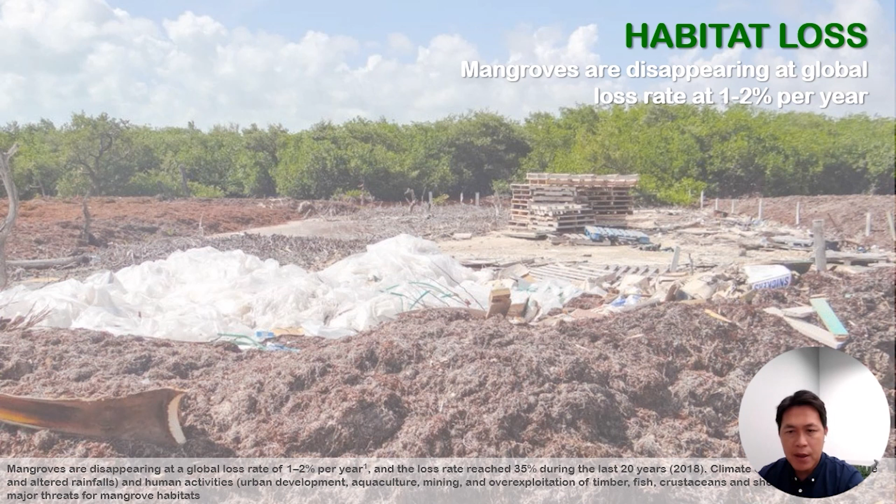While urbanization is happening in many big cities, people are trying to move to the city, and this causes forest loss. The forest loss also creates habitat loss. People living in coastal cities are always losing the mangroves. And air pollution is a very bad condition for people living in big cities.

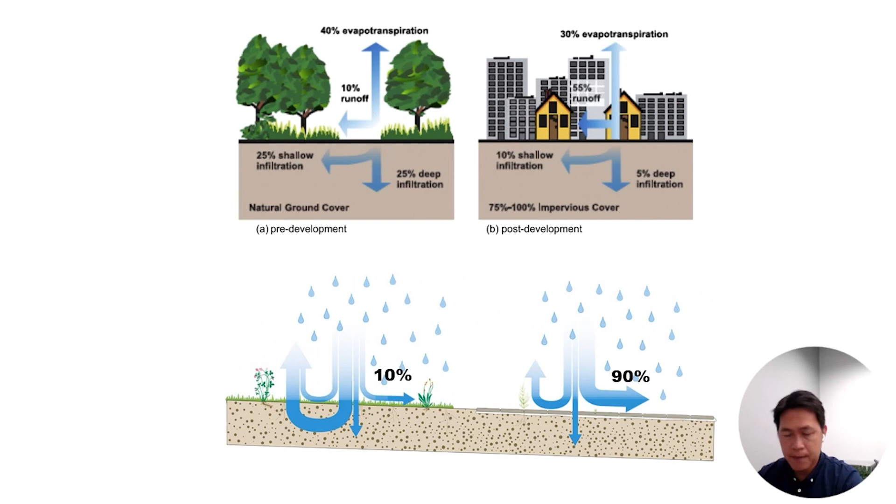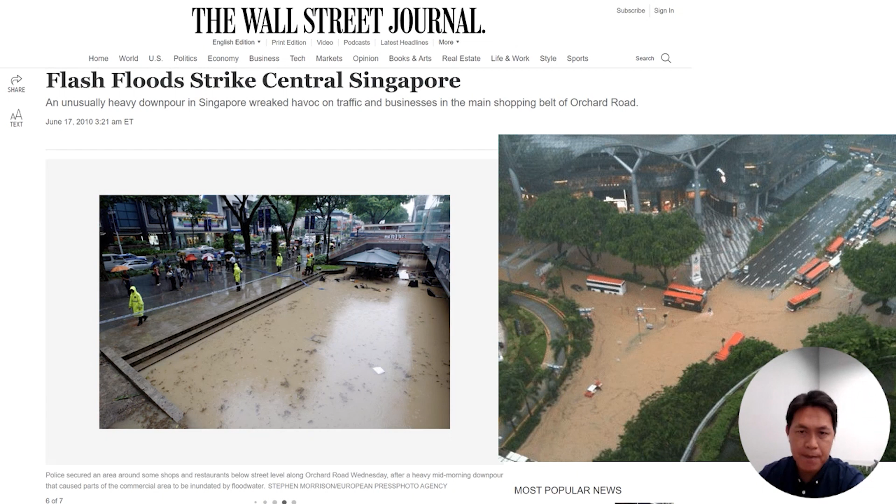When we replace nature with a built environment, we have more water to discharge to the waterway or drainage system. This causes very bad flooding across big cities because there are more and more people living in the city. They build schools, houses, apartments, while our river system is not adequate to handle this influx of new built environments.

It also happened in Singapore that in 2010, Orchard Road used to be flooded, and the flooding always caused river pollution because garbage and rubbish around the city mixed with the water.

So this is our problem. We live in the era of climate crisis. We used to have reliable weather, clean river, clean air. Now we cannot predict our weather anymore. Flooding was happening, and air pollution is a big issue in big cities.

Let's learn from Singapore City, where the government has tried to improve the vegetation cover. This is not a shortcut process; it takes time to reach what Singapore has now. In 1986, the vegetation cover used to be 35%, and now I think it's almost doubled already.

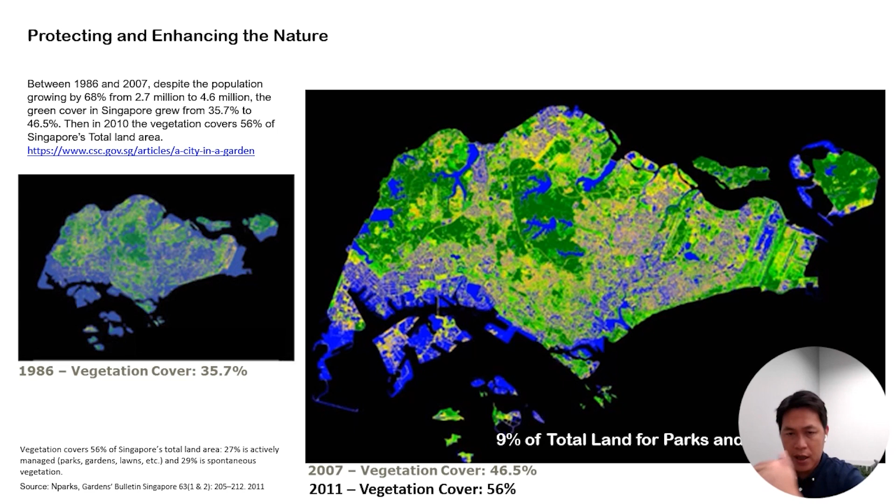The idea is really about how we return nature to the urban setting. Singapore has been turning the city into nature, meaning trying to bring more wildlife, more planting, and greenery to all different scales, from building interiors to park settings.

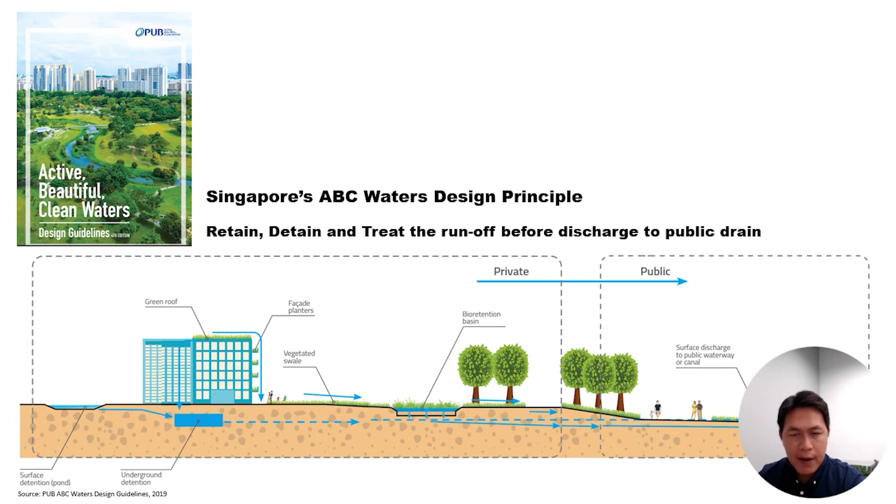To improve the blue-green infrastructure system in Singapore, we have guidelines called ABC Waters Design. The design guideline creates tools for retaining, detaining, and treating runoff before discharging it to the public drain—naturalizing the drain, keeping it within the plot, slowing down the runoff, cleaning it with the vegetation system, and then discharging it to the waterway.

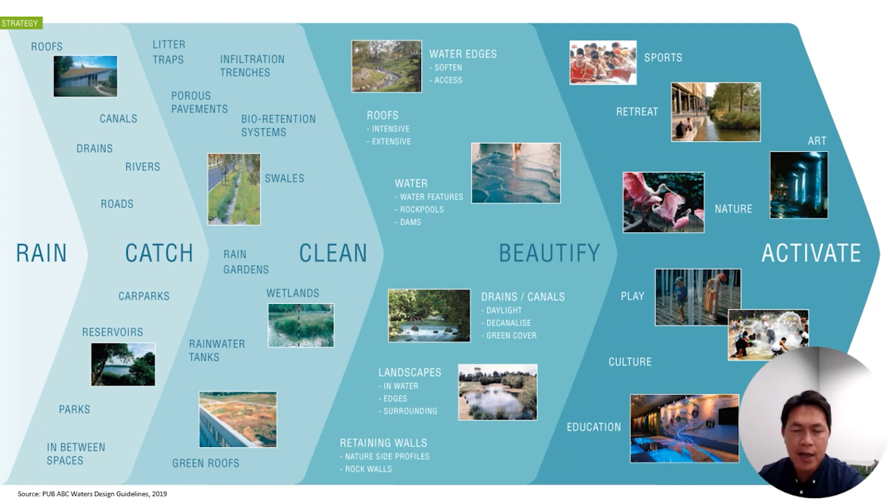This has proved to be effective because Singapore is part of a monsoon country that always has huge rainfall. So we catch this rain, clean it, beautify it as part of the landscape, and activate it as part of the outdoor program.

If we look at the traditional approach for engineering, it's always simple and fast—hard engineering. It transfers the water as quickly as possible to the river or to the coast.

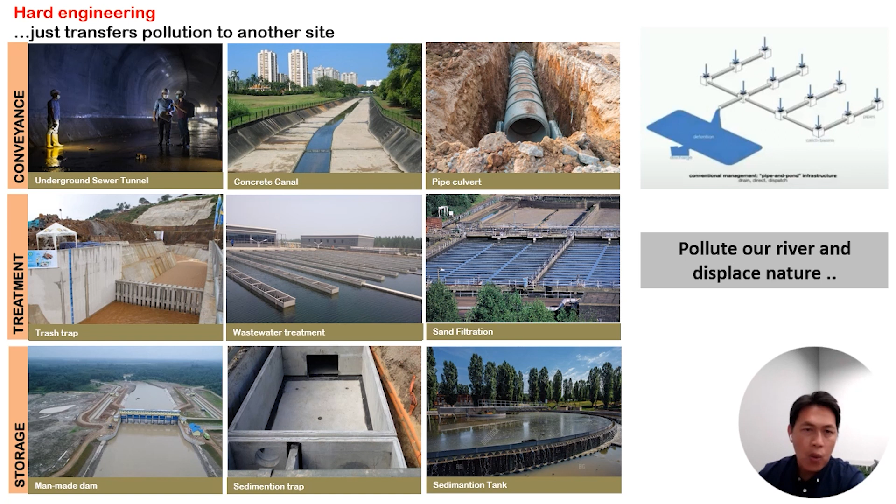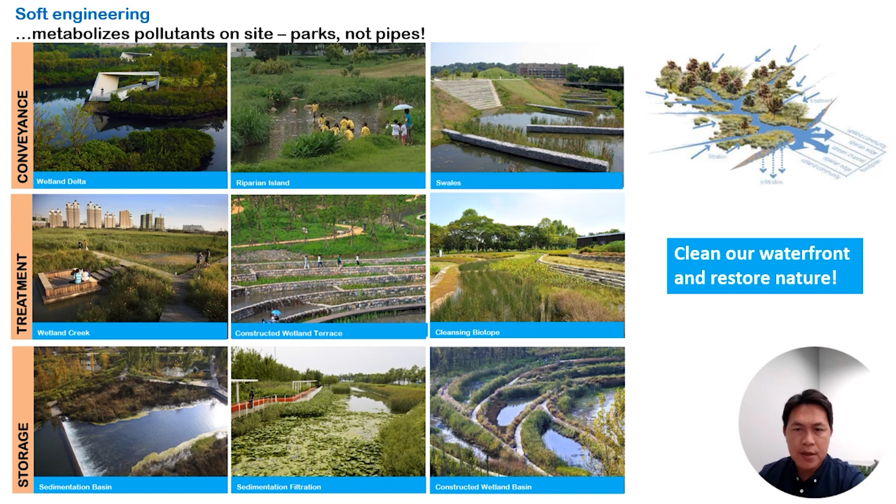Soft engineering is different. Soft engineering is to metabolize pollutants on site, and it cleans the water. It slows down the water, and it becomes a nice landscape that people can enjoy, also attracting wildlife to come within the aquatic area. So this system cleans our waterfront and restores nature.

Since 2006, it has launched the pilot project. Since then, each project that implements or adopts ABC Waters Design can be certified as a successful ABC Waters Design project.

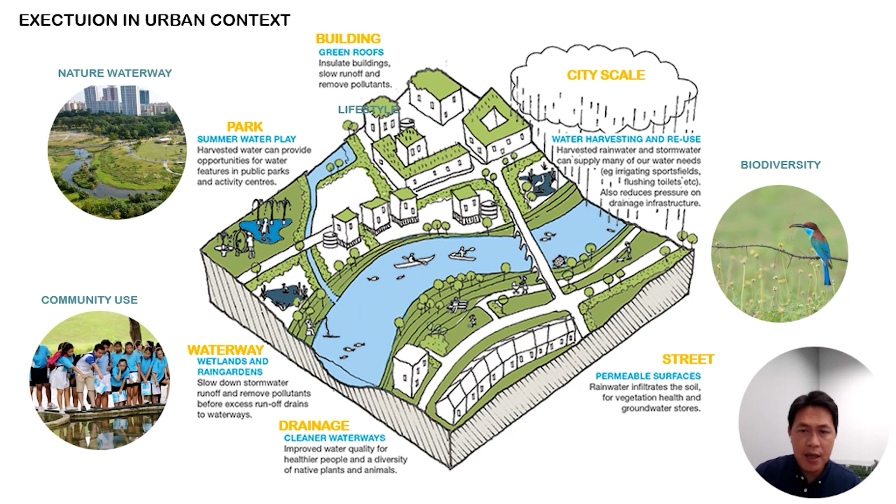So the execution of blue-green infrastructures in the urban context can cover many aspects—it can start from the city scale, building scale, park, waterway, drainage, and street. I'm going to give several examples of the execution at different scales.

So we start with the blue-green street. This project was carried out in 2015, a pilot project by PUB—the Water Resources Agency in Singapore—that wanted to upgrade the drainage at this existing real estate.

So what we did is transform the utilitarian drain into thriving vegetation. This used to be the drain. We opened it up, and it's a mix of hard and soft engineering.

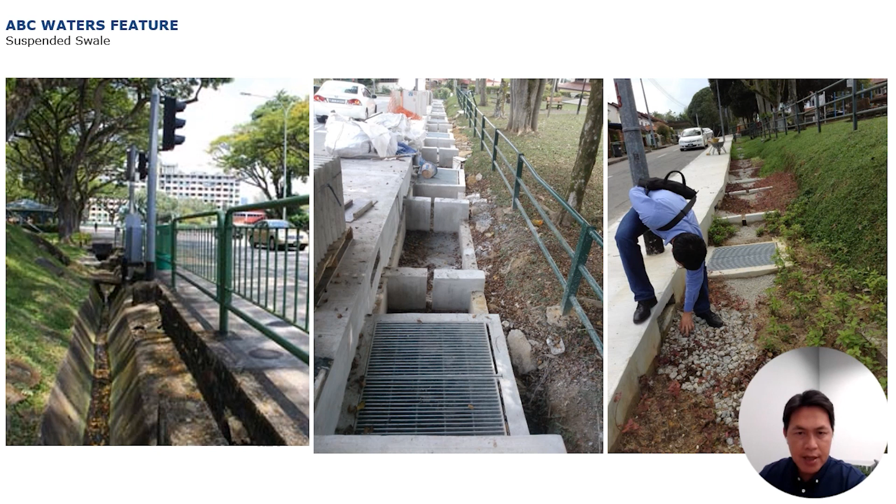The top part has soil, and the water infiltrates through a series of openings from the drainage cells. The water is then cleaned before it discharges to the waterway, and this is the result.

The drain becomes green, and these plants help to filter the pollutants as well.

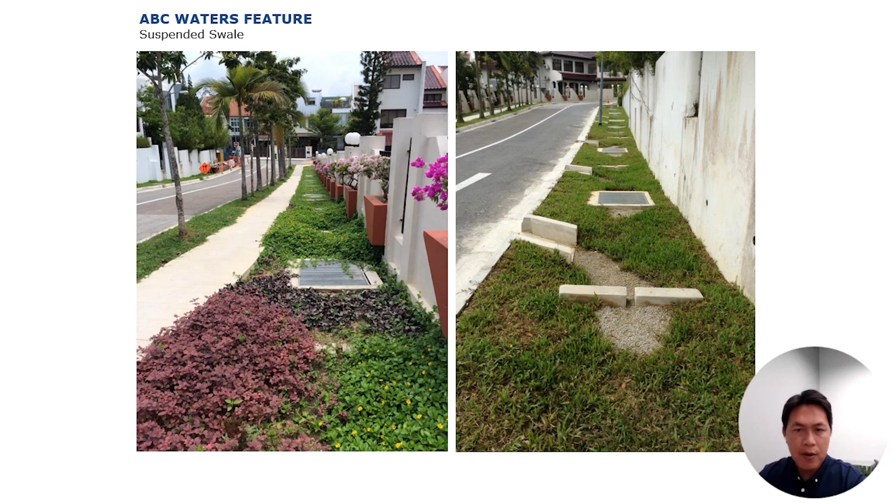Another example is how to design a detention basin. Look at the old picture—it used to be a small drain with a manhole. What we did was open up the drain and make it an open basin with rocks and vegetation to help detain and filter the runoff.

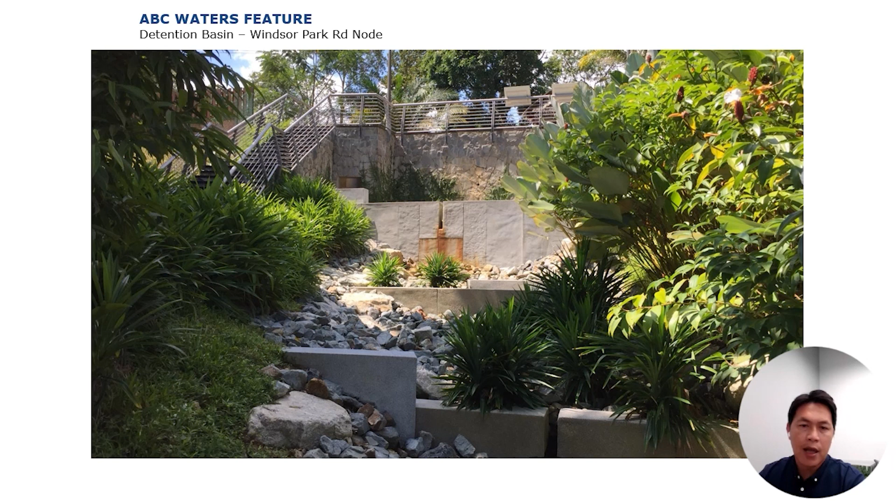This is the result—simple results of how we turned the lawn into a huge detention basin that helps filter out the waters. This is another case where it used to have a strip drain and big lawn. When we needed bigger capacity to hold the runoff, we opened it up with a vegetation system and detention system, and of course with hydraulic calculation as well.

The result is landscape that looks much more alive because it attracts butterflies, dragonflies, and many other insects to come into this mini ecosystem.

So the idea of ABC water design is really how we turn the mindset—avoid concrete but provide space for more nature and water ecosystem, creating a more pleasant environment for people to walk, see, and feel it.

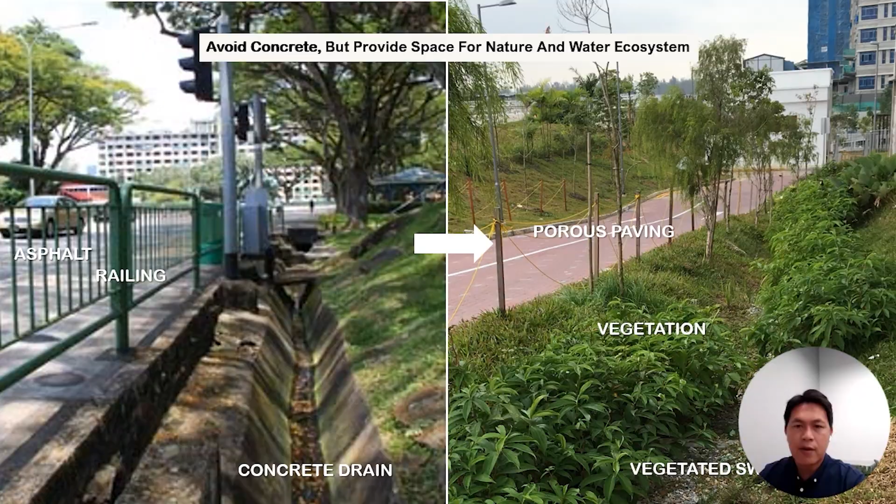The next project is a blue-green building. When I was in Singapore, I worked as the landscape architect project manager, and it has won the World Building of the Year.

The building itself has various spaces from playground, open space, water retention system, and skyrise greenery.

So the idea was how we capture the rainwater—we clean it with a series of ABC water design from the green roof, vegetative filter, rain garden, and keep it in the harvesting tank, which we reuse for irrigation. The overflow water is also kept within the eco pond that acts as a detention and cleans it with a cleansing biotope.

So all the water used for irrigation is reused for the entire planter area.

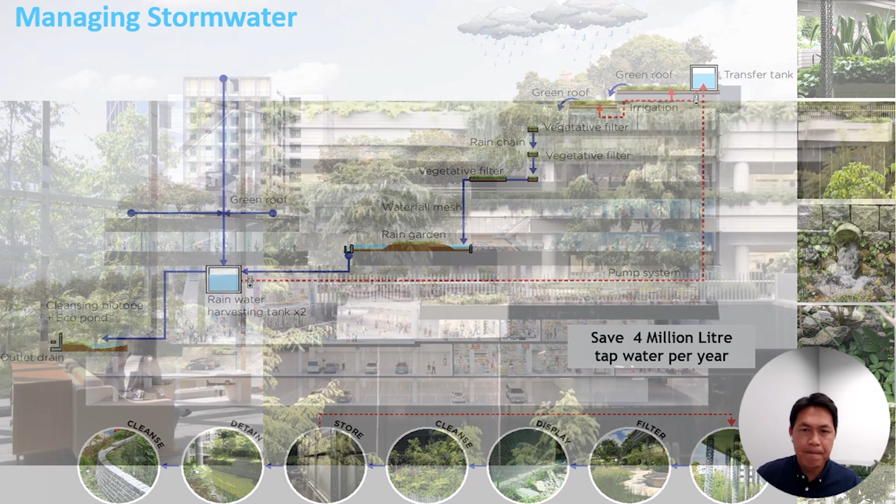At rain time, you can see this water cascading down from the rooftop and becoming part of the landscape features that can be enjoyed inside the building.

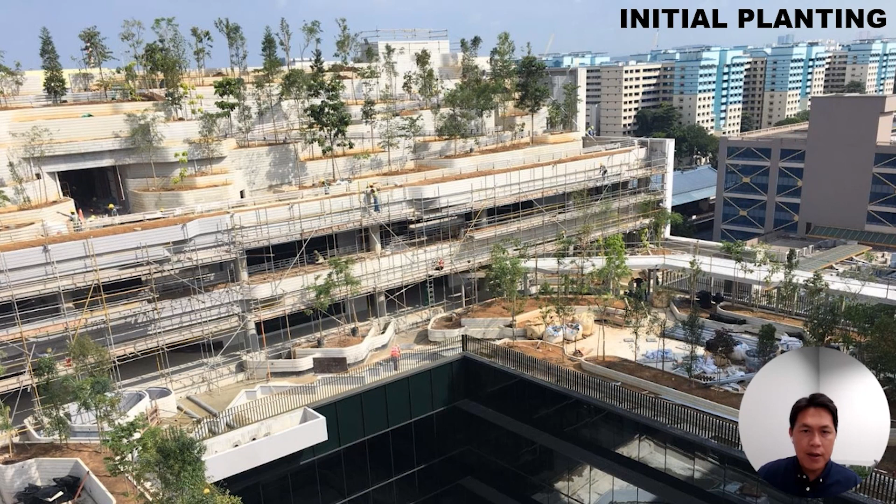Initial planting was small trees. After one year, the trees are growing fast because they received a lot of water that we took from rainwater—we recycle and reuse it for taking care of the plants.

And now almost the building has disappeared into this forest.

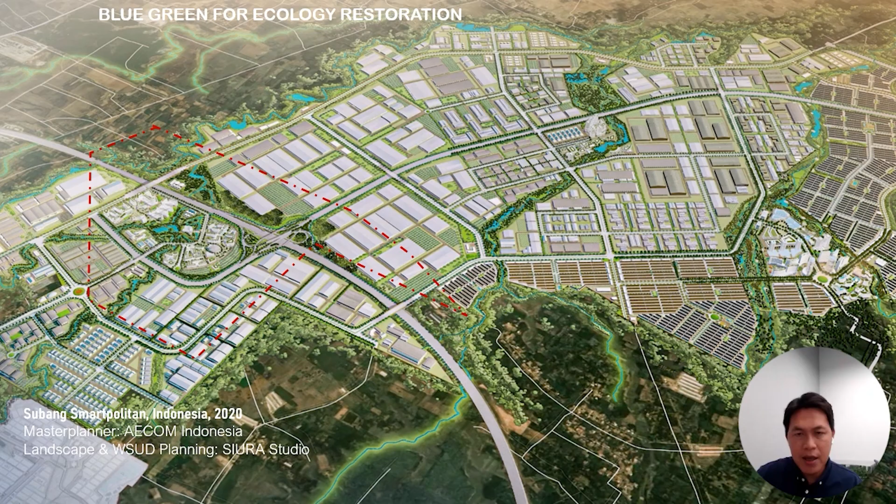How do we apply blue-green infrastructure at the township level? We were approached by a client with an industrial master plan of about 2,500 hectares, where 7 rivers pass through their new development.

The idea is really about transforming the mindset, changing basic hard engineering design into a soft engineering design. We created different thematic zones along the river corridors that also have capacity to hold water as part of flood mitigation risk.

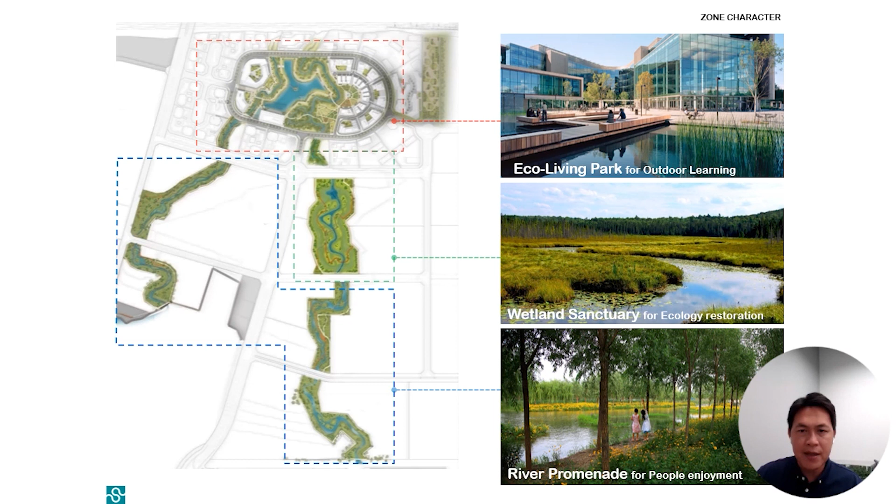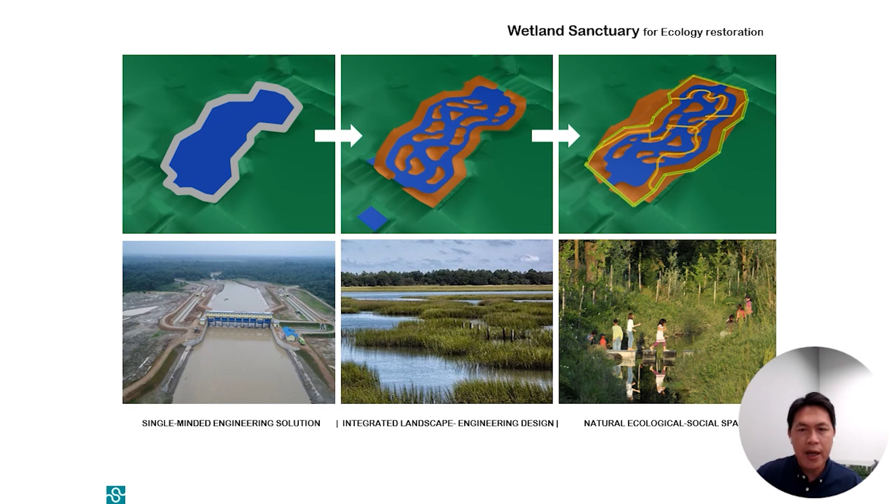So we changed the single-minded engineering mindset into an integrated landscape engineering design, where we created a constructed wetland island. We created a boardwalk so people can access this river ecosystem, and the river can be used for various recreation spaces. It still has capacity to hold a 25-year event runoff.

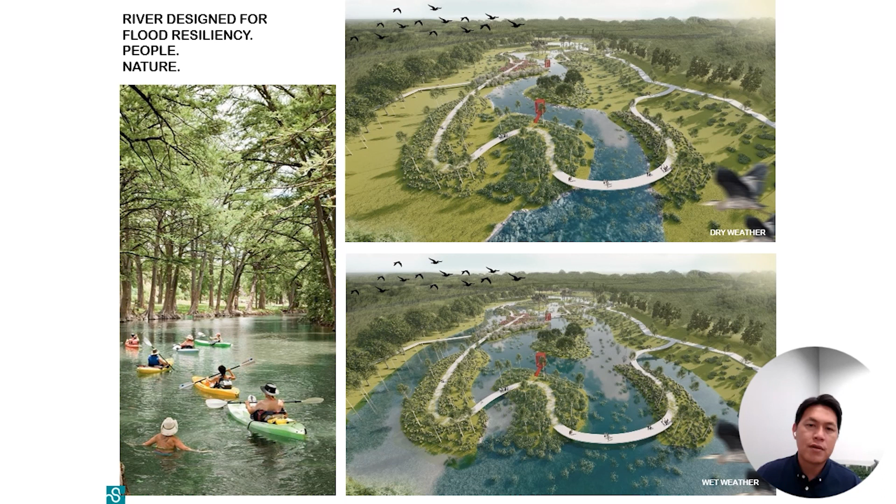On the edge, we planted a lot of native riparian plantings that function to protect the living ecosystem.

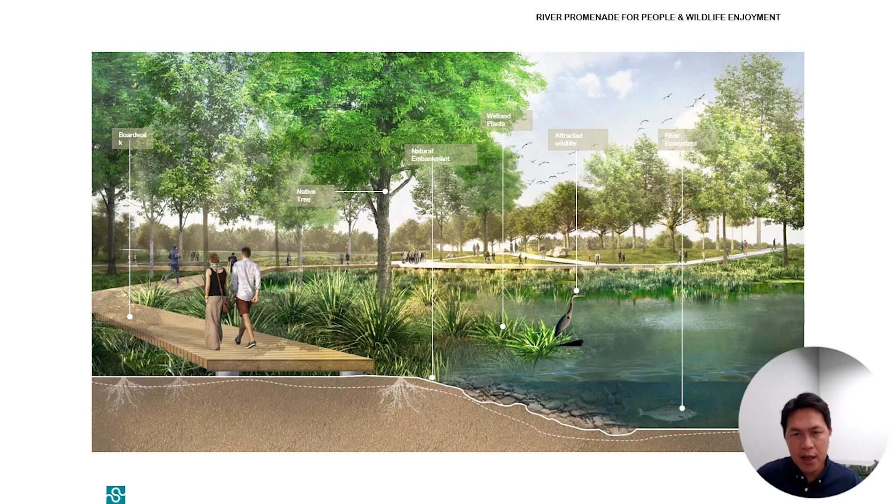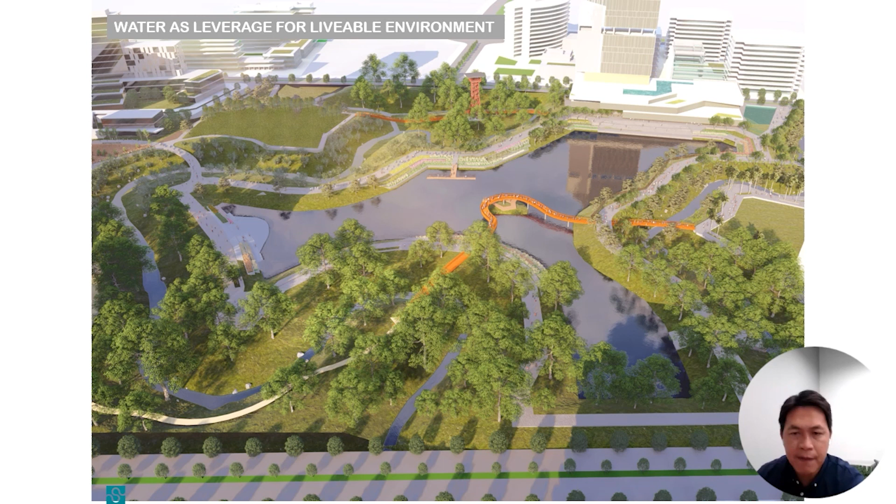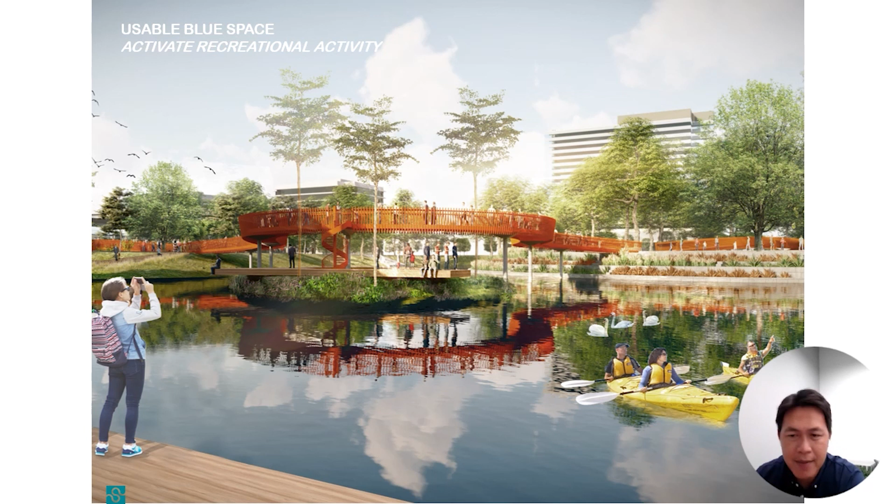When the rivers discharge to the retention pond, they also get cleansed by a series of rain gardens, and it functions as a social space for people to walk around the lakes, cross the lakes, and become part of the recreational space with clean water by the biotopes around the lake.

The next project shows how we implement blue-green infrastructure at the park scale. Tebet Eco Park is located in Jakarta. The project was just completed in 2022. We were the lead consultants working on the project that was transformed within 15 months.

Tebet Eco Park is located at the center of Jakarta. The size is around 7 hectares, full of mature greenery, but surrounded by many residential buildings.

When the park opened in 2022, we were surprised that there were a lot of people coming to visit—around 60,000 people even came in one day, and we wondered why people wanted to come to the parks.

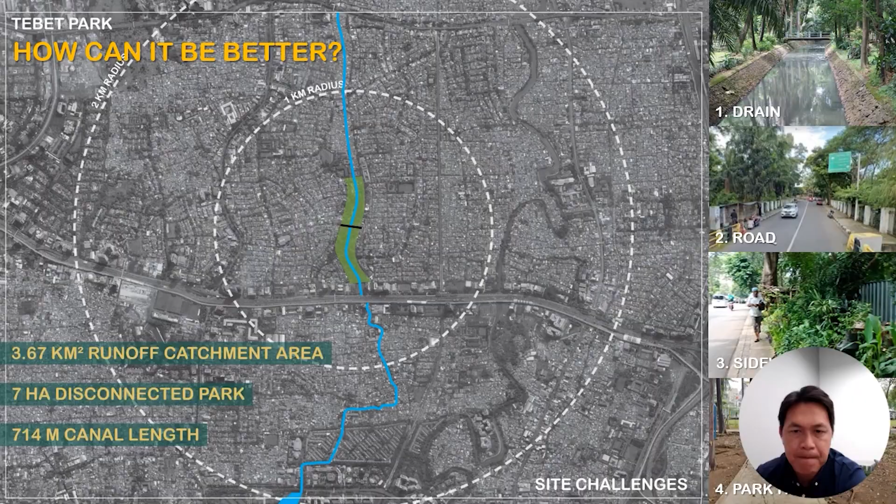Let me share about the design process from the start. When we were approached to design this, we saw there was a lot of opportunity as well as challenge.

We dealt with 4 agencies at the same time—the agency handling the drain, the road separating the park, the sidewalks, and also the park facilities.

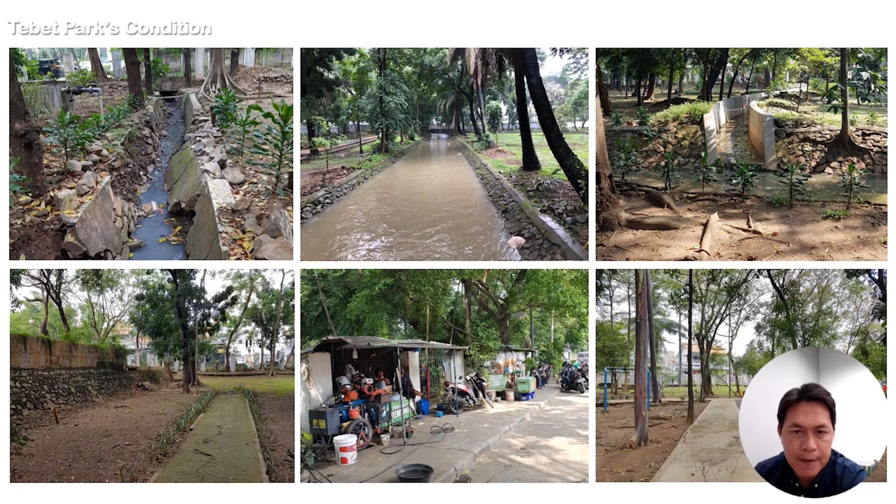This was the condition when we visited the site. The perimeter drain had been damaged, the concrete canal had insufficient capacity to hold the waters, and many spaces had been broken. The hardscape and trees were in poor condition, and the perimeter of the park was occupied by illegal sellers.

And within a few hours of big rain, the park is flooded because of the overwhelming inflow from the huge catchment at the southern area. It comes and it overflows the entire park. So we do a hydraulic study.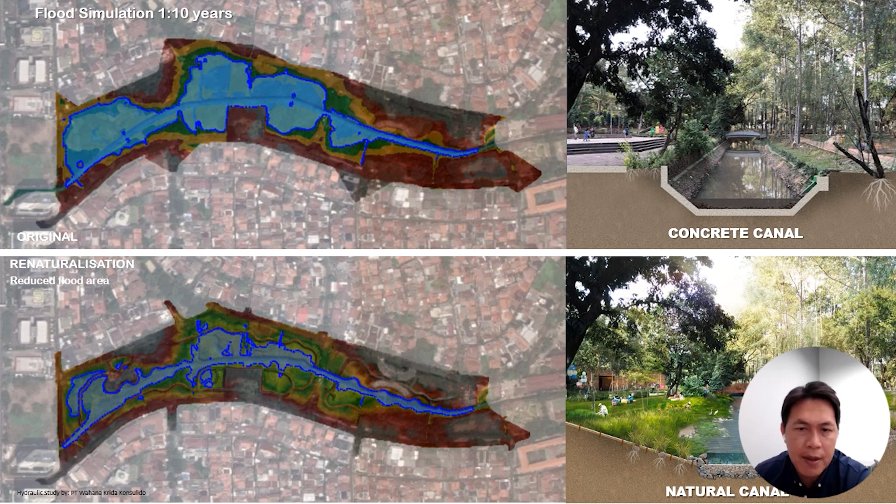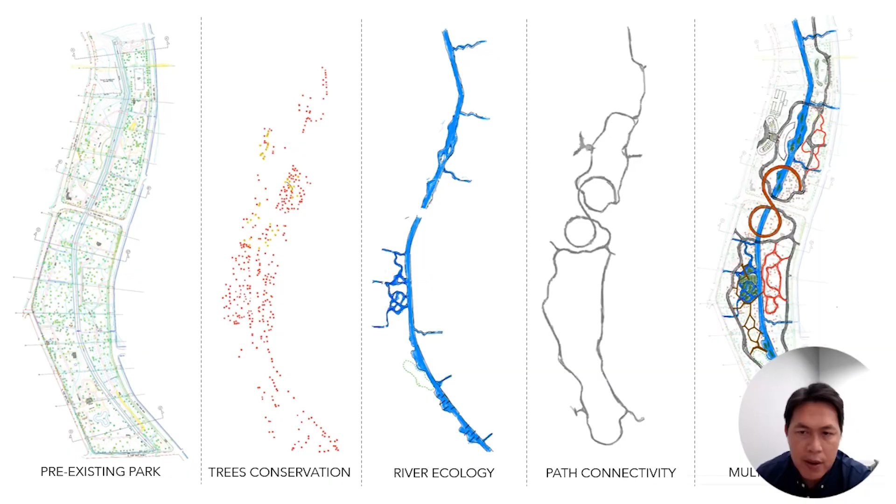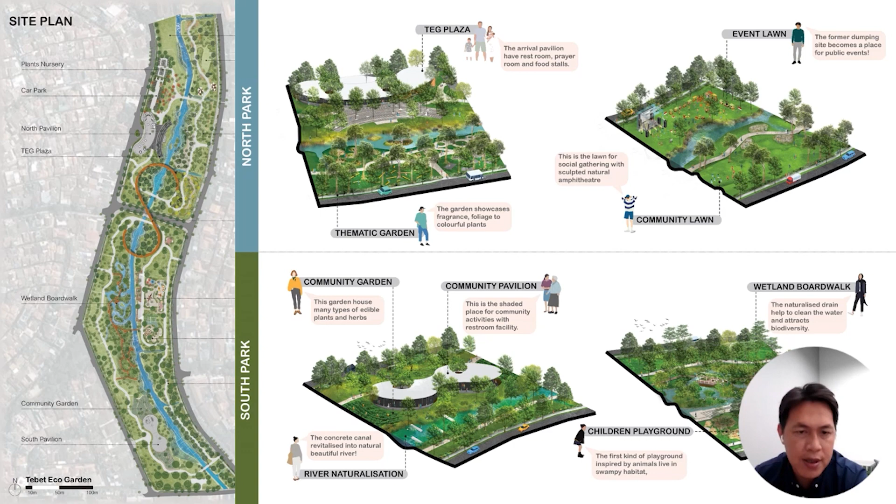So the idea is really working with a pre-existing park to conserve the trees, to naturalize the drain, to create a full path connectivity and inject many programs along the naturalized rivers. And programs are created along this water spine, designed for all age users and also inclusive for everyone.

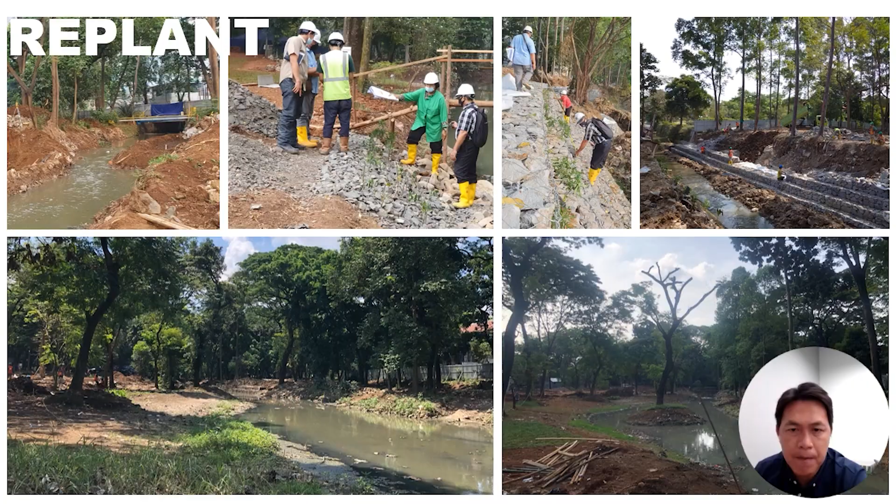We also reuse the materials that we took from the site, such as the existing stone wall and paving, and this turned into the path completion or gabion wall. Working with the locals is really about understanding the local cultures and context. So we do a lot of mock-ups for the bioengineering.

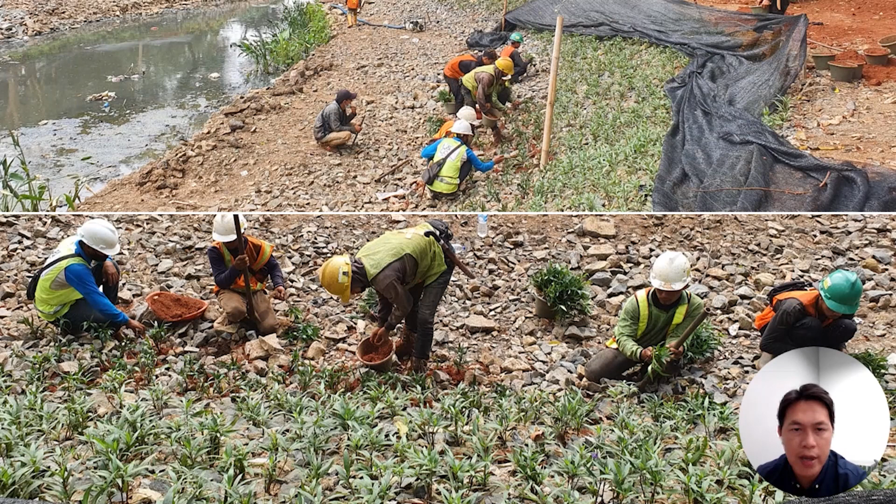For example, we have a gabion wall that is planted with vegetation, and this was the construction image showing that when the river is opened up and when we put in the new loose structures such as rocks, riprap, and geotextile, the river becomes wider and slower in movement. And then we planted all those bioengineering systems with the native plants.

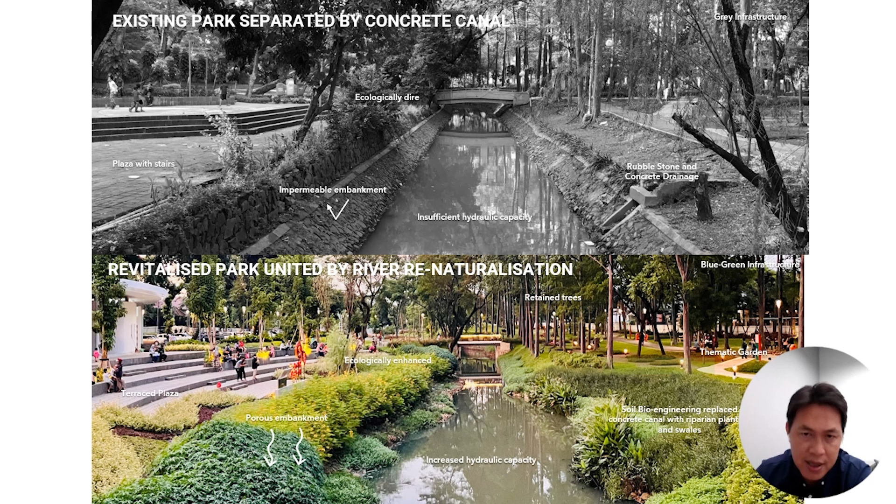The result is amazing. The existing park that used to be separated by a concrete canal now is united by the river renaturalization. It creates a porous embankment, increases hydraulic capacity, and attracts biodiversity, while most of the trees are still retained.

So the impact is powerful. When we renaturalize the existing canal and turn it into a natural slope, it allows the animals to nest, to rest on the slope, and allows people to come down to be closer to the water.

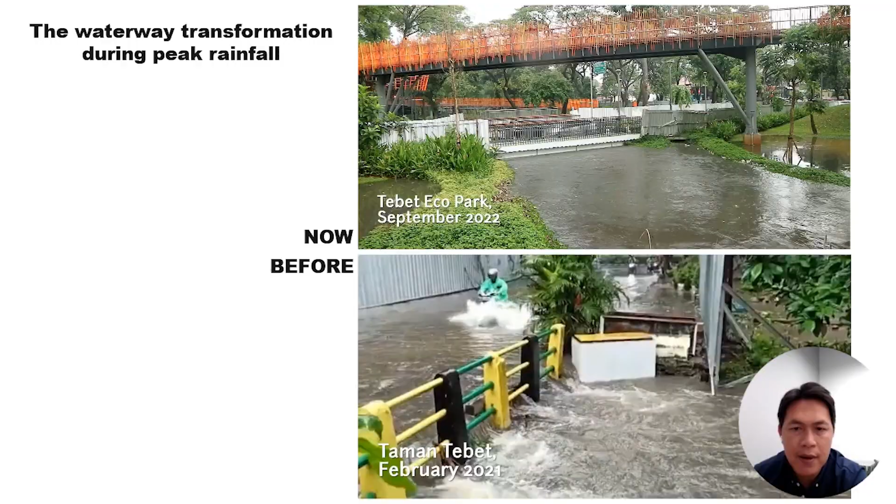This shows how the park is now also performing as flood mitigation for the entire neighborhood. The capacity has been increased two times, so it detains the water at the dedicated area during the peak rainfall time. So this video shows the difference between before construction and after construction.

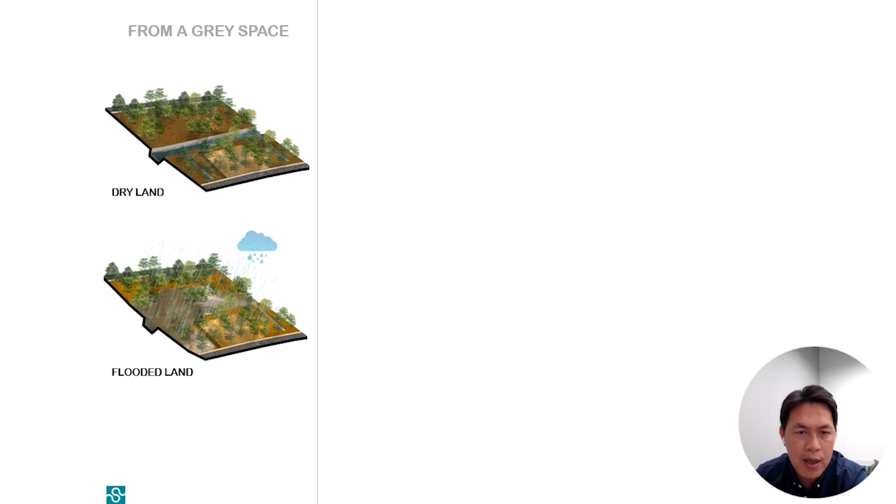There is more space to keep the water, and after a few hours, the water subsides, and the vegetation is keeping the ground and the erosion control is working very well. There's also a space that we designed as a constructed wetland. This happens when there are a lot of drains coming into the big canals without being filtered, and this caused the flooded land along the constructed wetland area.

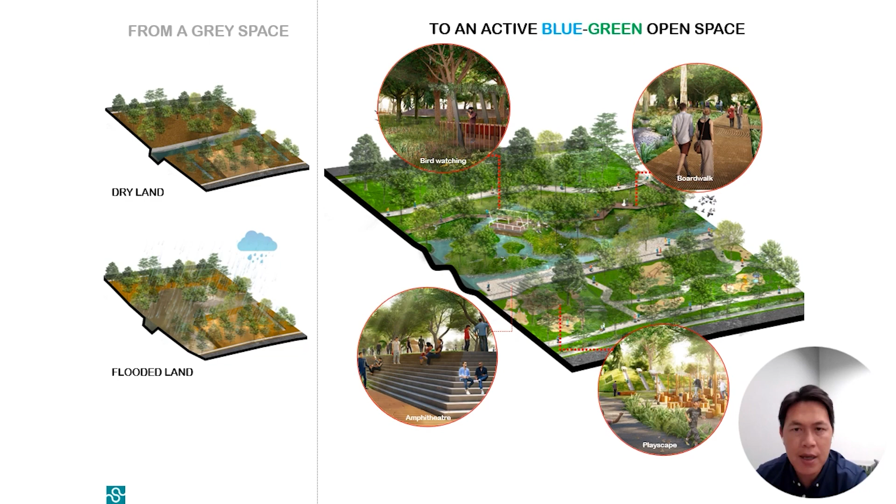So the idea is really to create these islands of water that function as detention and cleansing, and also introducing the boardwalk so people can see the process directly. So the result is a space that used to be dirty and flooded and now becomes a thriving, active blue-green open space. So we changed this condition from man-made intervention into a nature intervention and into a thriving nature

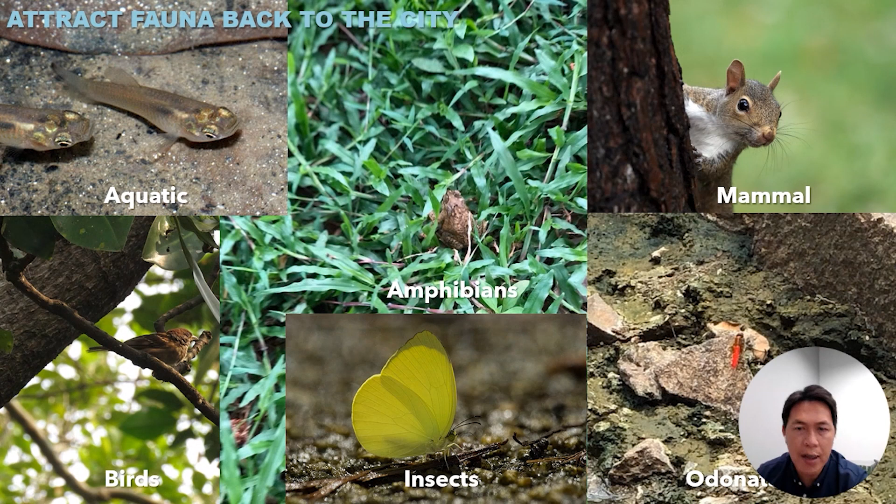that attracts more biodiversity and wildlife: fishes, frogs, butterflies and dragonflies all come here. So we have seen the transformation, a simple gesture of creating the blue-green infrastructure, allowing animals to come back to the urban context. We see different kinds of amphibians, mammals, insects, or birds coming to this very crowded Jakarta city.

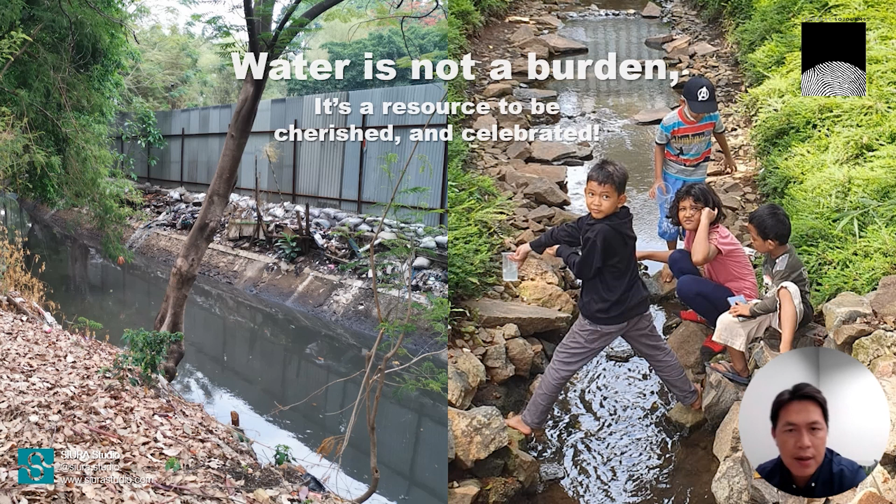So, as a summary, water is not a burden. We have seen these pictures many times in the big cities, but when we turn it into beautiful landscape, it makes people want to be close to the water. And the kids that used to be away from this condition are now getting closer to play with the water. So let's make friends with nature.